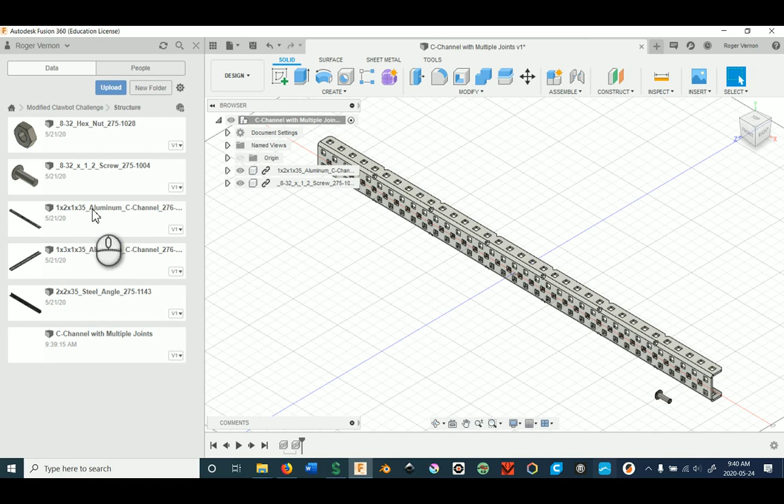And I've brought in a 1 by 2 by 1 by 35 aluminum C-channel. This is a standard VEX part that you get. I've also brought in one of their number 8, I believe this is the 1/2-inch screw. So a pretty standard move if you were modeling a VEX robot or lots of different things is to be able to put this screw through a hole somewhere and put a nut on the back. I'm just going to show you how to put this through.

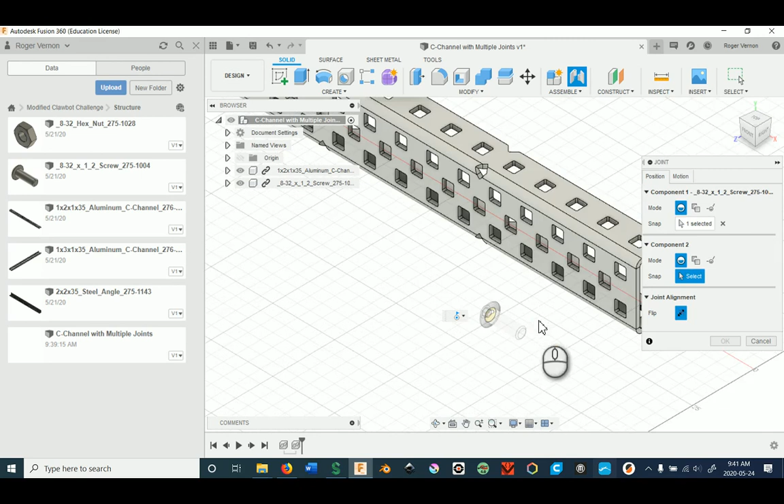So if I was to say join this and I'd want to put it through one of these faces, you can see it doesn't give me a center of the hole anywhere. Now that's fine. In order to do a center spot, I do what's called a joint origin, but to do that you also need to break the link to the previous component, the component that I'm going to be modifying. So that's now broken, and in order to assemble it, I need to create a joint origin, a place to be able to join it.

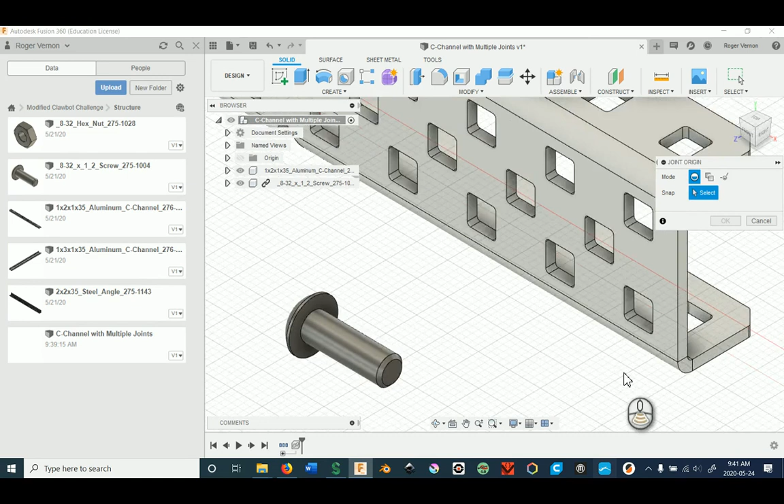And I'm going to put it actually between two faces, between this face here, orbit around, and that face there, and I want to put it at the center like that, but I also need to reorient it to that face there. So now you can see it's a flat face. Okay, that's great. Boom, done.

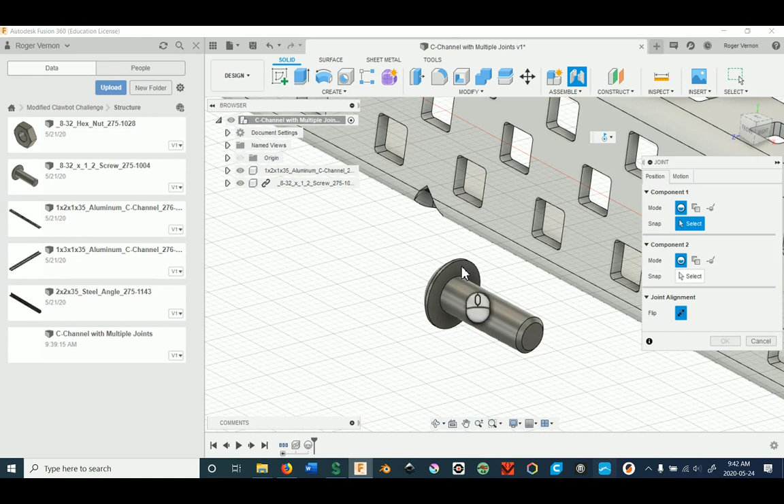And then of course now I'd be able to join the center of that cylinder there to the center of that one there. And it's coming backwards, so I would flip it, and now I have a screw in the right position. And I can put a nut on it, etc., or more metal, whatever it needs to go there. Okay, so that's fine and dandy. I can do that. Whoops, I don't want to okay that.

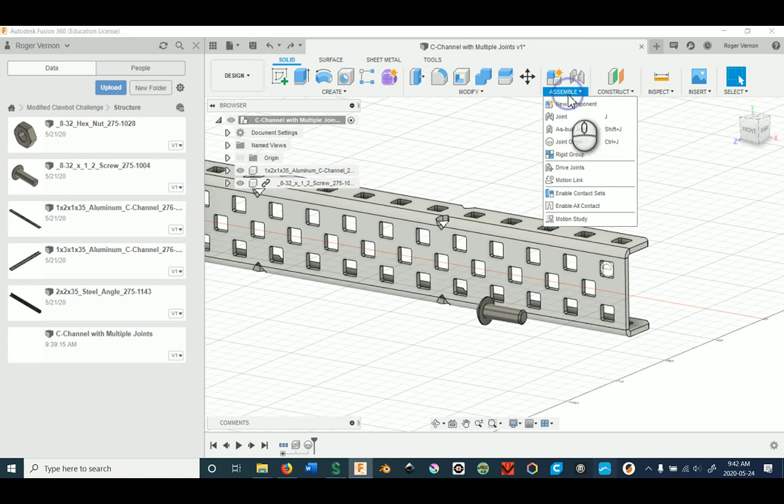I'll keep my screw. The problem, of course, is if I want to do, I don't know, 2 screws next to each other or 4 screws to hold a piece of metal in here that couples up. Well, I guess I've got to go do another joint origin, because sadly there's no way to take the joint origin, copy and paste it, move it, whatever. There's nothing. There's no patterning. You cannot multiply a joint origin, which is quite frustrating when, say, you need to put 4 here, 4 here, 4 here, and 4 here to piece together your model. That's quite challenging. So, a workaround.

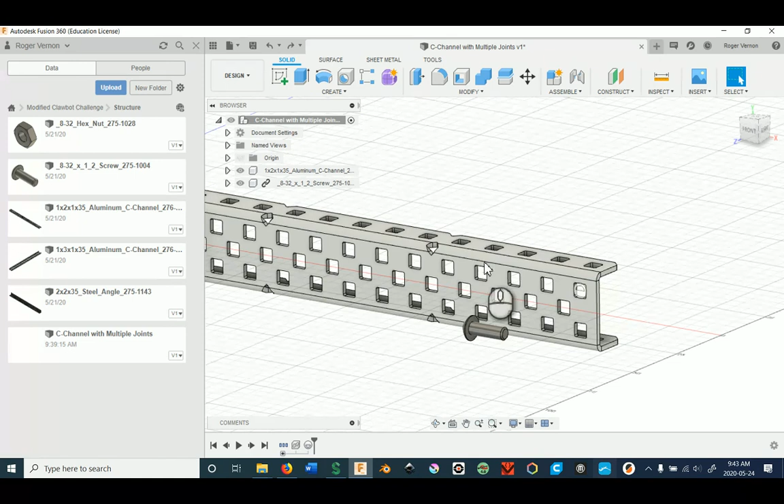What you do is create a version to start with, so that you can bring in this version of your C-channel for all of your pieces, and then you can modify them from there. What you do is create a sketch on a face that you're going to need to attach to. And nicely, points work just like joint origins. So I'm going to create a point. I'll create it over here. Actually, I'll put it in the bottom right so then we can see it.

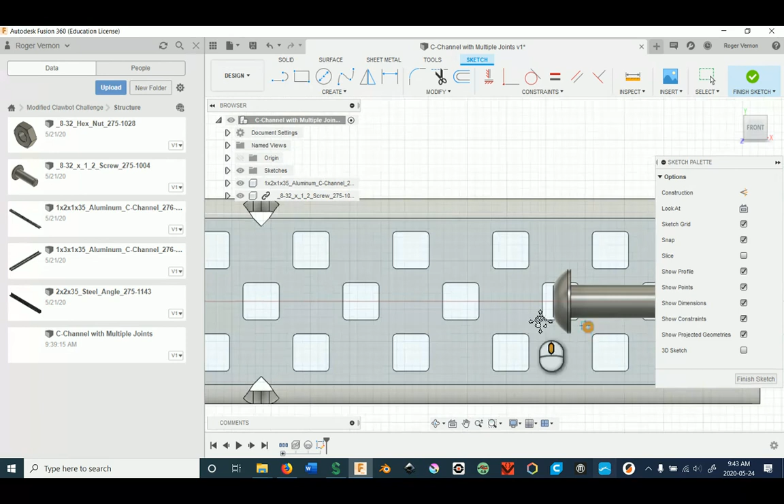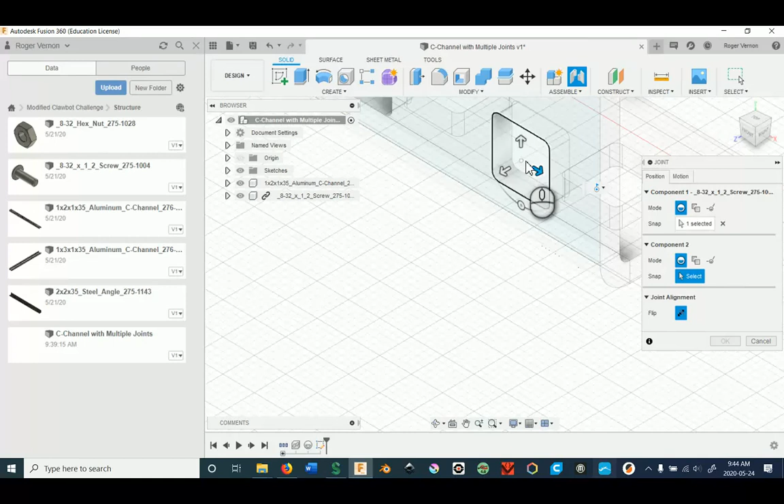So I'm going to find the midpoint here. Triangle means midpoint, and the midpoint there. And I'm just going to come on out until we get our crisscross, and now I know that's a dead centered point. Great. Finish it. Come on back out so you can see. And I will press J for join, and I'll take that face there again, getting the right spot, and you can see the point now gives me a perfect place to join to. And I can flip it, and we've got the same thing as we did before.

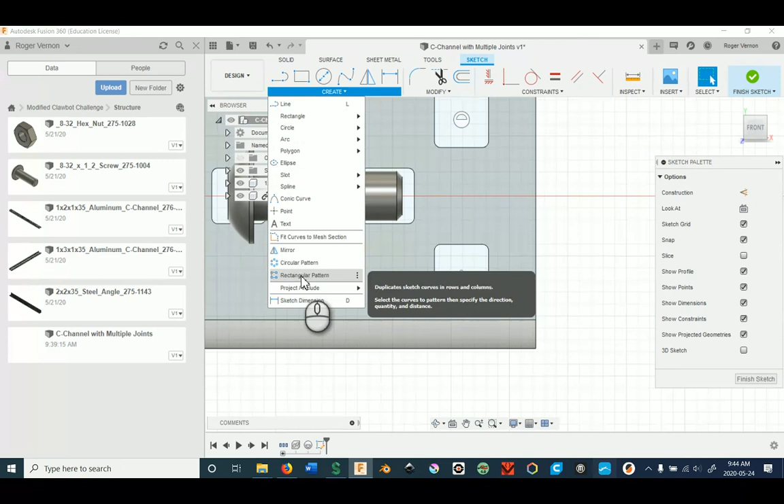Hooray! But the beauty of a point versus a joint origin is I can pattern points. You again have to do that in the sketch, because a point is not a 3-dimensional object, it's a 2-dimensional thing with just an X, Y coordinate. And now I want to go to create rectangular pattern. I'm going to select my point. Got to kind of highlight it because it's difficult to click, and I'm going to drag it out, and you can see the value that's changing, so that is that direction. I'm just going to keep it as a single row right now, and I'm going to drag out my 3.

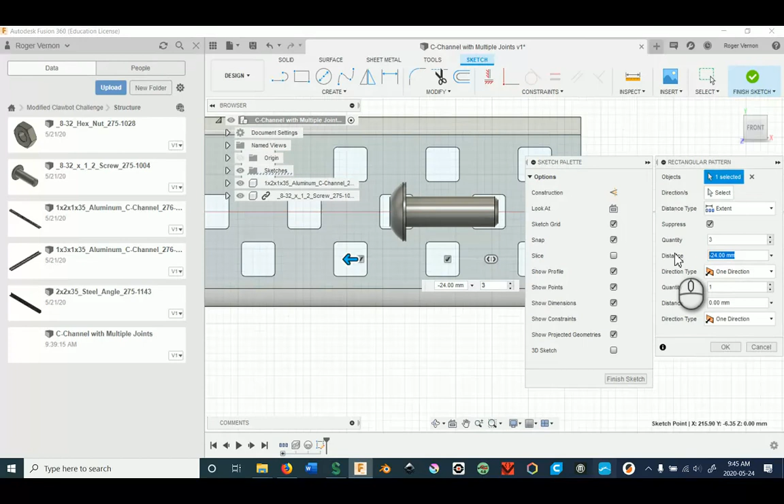Now the distance itself here, I've got it in millimeters. VEX parts are all in inches. So the 3 copies: the 1 represents the original, so this next one would be 2 and the next one would be 3. Each gap is 1/2 inch and 1/2 inch, so my total distance is going to be 1 inch, 25.4 millimeters, or just 1 inch. And it's going the wrong way, so I actually need to make that a negative. There we go, and we've got them perfectly centered all the way along.

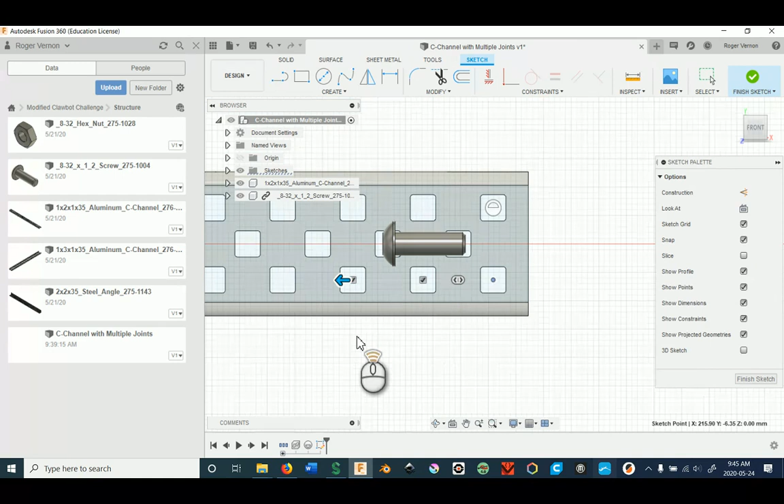If I wanted to do the whole length, I would just count the number of holes instead and change that pattern to being the whole length of this, which is 17.5 inches long because it's 35 holes long. That's the 1x2 by 1x35 part. So 17.5 inches is what I could have done instead and had 35 holes to give myself the entire row. And then I have all of those set up. So if you do a bit of setup ahead of time, you can actually have an entirely set up piece of aluminum C-channel that you can then bring into new assemblies to create your VEX robot.

All right, folks, there's your workaround for joint origin challenges.